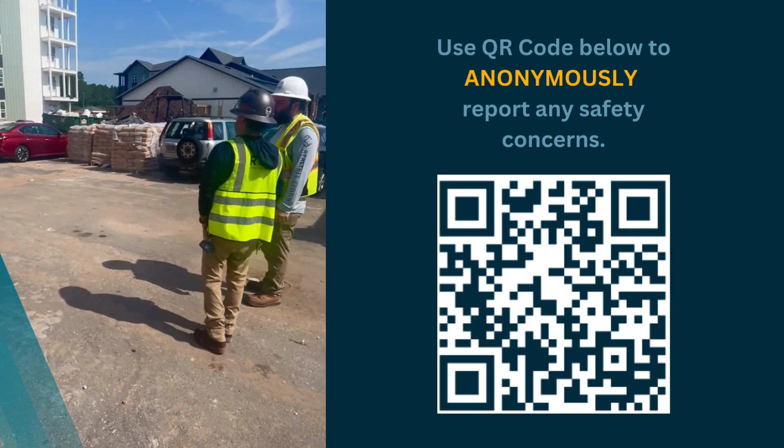RISE is dedicated to the elimination of construction accidents, injuries, illnesses, and fatalities, with the ultimate objective of returning construction workers home to their families, friends, and communities free from harm. At RISE, safety and health is a value which will never be compromised. A safe and healthy work environment is a basic right for all.

Our first and foremost responsibility is to protect our employees and the environment. In addition, we believe we owe it to anyone and everyone working with, in, and around our projects, and to maintain and continuously improve our safety performance. We are committed to protecting and preserving the safety and health of our employees, customers, other contractors, the public, and the environment.

Fostering a culture of caring, trust, and openness by empowering our employees to own safety at a personal level, and by openly supporting and enforcing this policy through the use of stop work obligation and intervention. Providing safe products and services to our customers.

To carry out this policy, RISE will provide appropriate financial, human, and organizational resources to plan, implement, check, review, and continuously improve our health and safety management system. Actively promote a safe and healthy workplace with management leadership and employee involvement. Hold each supervisor accountable for ensuring employees, equipment, and facilities within their area of responsibility are managed in a safe and healthy manner while protecting against negative environmental impacts.

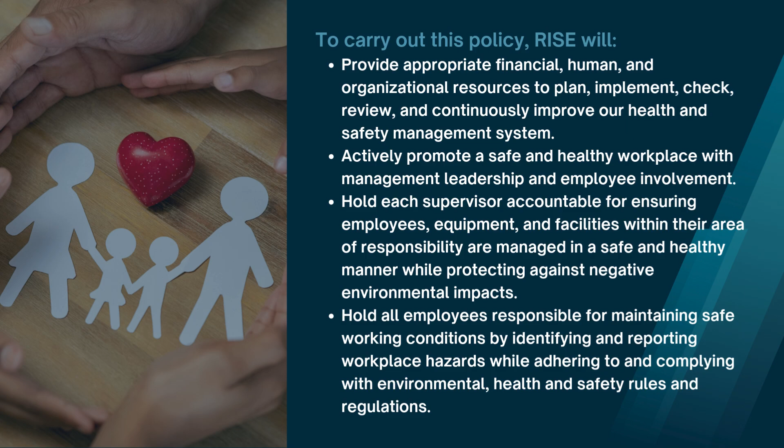Hold all employees responsible for maintaining safe working conditions by identifying and reporting workplace hazards while adhering to and complying with environmental, health, and safety rules and regulations.

Our expectations: Subcontractors must provide competent, knowledgeable supervision of their crews at all times. Maintain frequent communication with the site team. Encourage questions and open communication. Actively participate in site safety and related events.

Promptly report any hazards overlooked by our team. Report all accidents without delay. Provide skilled and experienced crews. Attendance at weekly subcontractor meetings is mandatory.

Inform us of any assistance required to facilitate your work with us. Foster a culture of encouragement within your teams. Maintain clear communication with your crews.

Proficiency in utilizing Procore is essential. Follow all safety rules, policy, and procedures. Perform all work in a safe manner. Report all unsafe acts, safety issues.

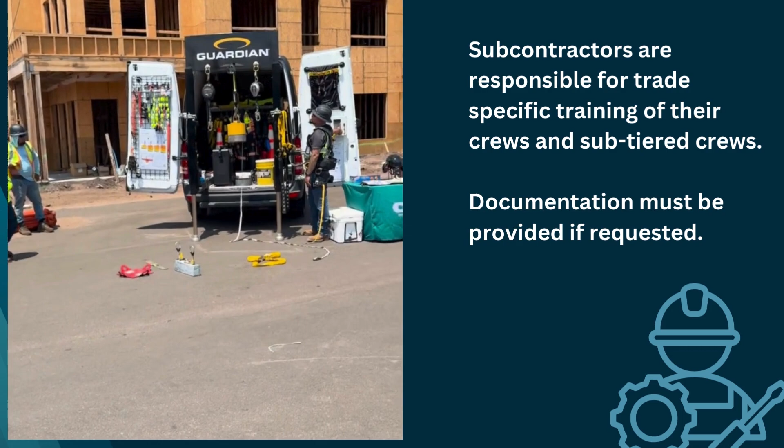If asked to perform work in an unsafe manner, report directly to the site team. Wear appropriate PPE at all times. Subcontractors are responsible for training all of their sub-tiered crews and must have documentation available upon request.

Now we will go over a few basic site safety rules we expect everyone to follow. All personnel must attend a RISE-led safety orientation prior to beginning work. No drugs and/or alcohol is allowed. Any visibly impaired worker will be sent home.

The possession of firearms and/or other weapons is not permitted. Loud music and portable audio devices are not allowed, as loud music can become a distraction. No talking and/or texting on your phone while operating any equipment.

Before operating tools and/or equipment, make sure you inspect that equipment and that you have been properly trained to use that equipment. Fall protection is required for anyone working at heights greater than 6 foot. Do not remove guards or disable safety devices on any equipment you are using.

There is no food allowed in the building, period. Smoking is allowed in designated areas only and never inside the buildings.

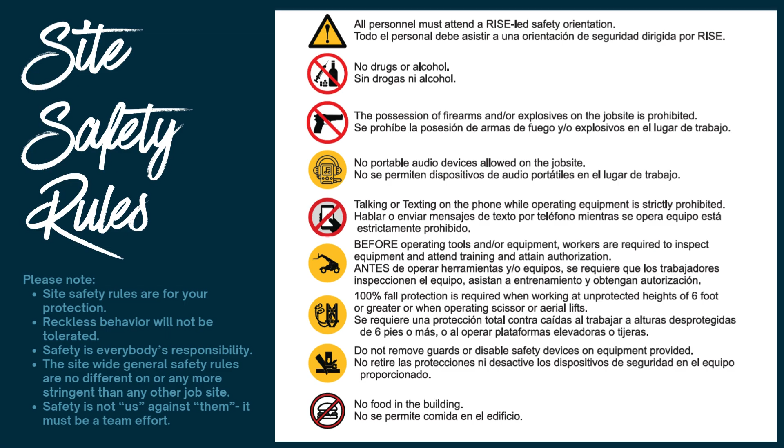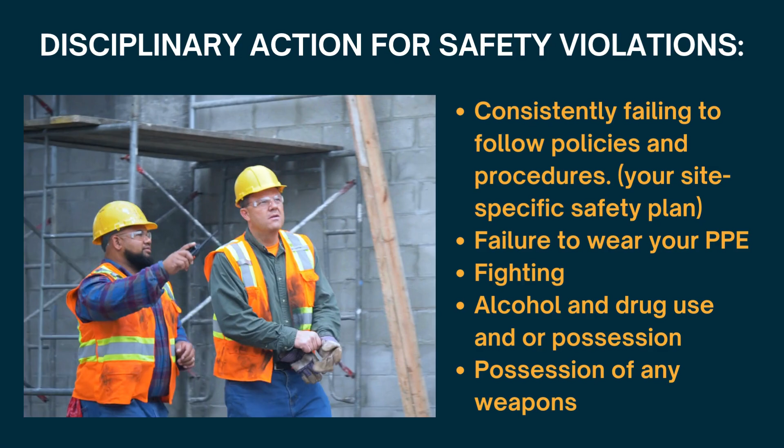As previously stated, RISE has a multi-level disciplinary policy and will be closely followed. Some of the project-specific guidelines for grounds for removal from the job site include consistently failing to follow policies and procedures, your site-specific safety plan, failure to wear your PPE, fighting, alcohol and drug use, and/or possession of any weapons.

Now we will cover the site logistics plan. Please keep in mind that this plan changes frequently as the site and duties change.

The site logistics map should be located inside and outside of the job site office and holds key site information, such as the following: location of entrances and exits, restrooms, parking areas, the location of the nearest medical facility should an emergency occur on site, fire alarm locations, the general flow of traffic within the job site, and will also have the RISE site team's contact information.

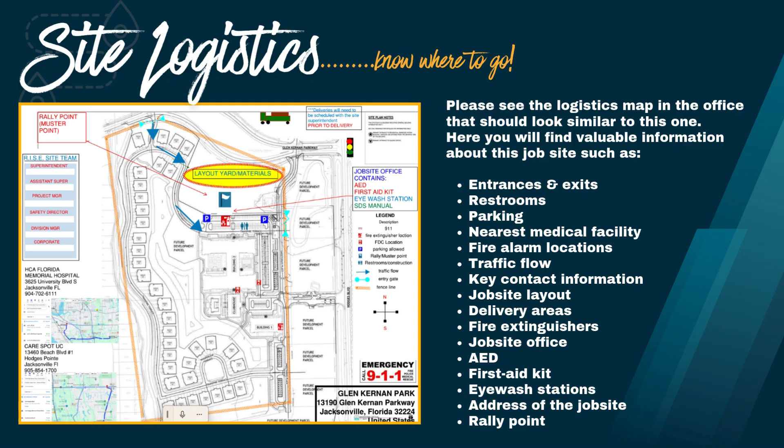As a reminder, please do not block entryways and/or exits.

Have deliveries set up and coordinated with the site team prior to deliveries arriving, and make sure that you have the manpower to offload any materials being delivered, as well as any equipment needed to unload.

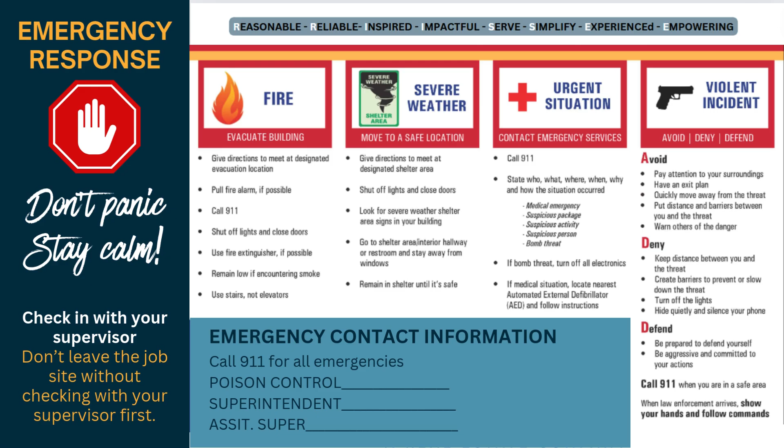The site first aid kit and AED, along with the eyewash station, are all kept in the site office, along with the SDS manuals. Use this chart to determine the course of action for emergencies that may occur while on site. Remember, stay calm during emergencies. Always check in with your supervisor, and supervisors need to make sure to stay in communication with the site team for further instructions. To clarify what should be considered an emergency, use the following definitions when choosing your course of action.

A serious injury is defined as an injury which is an acute threat to life: the worker is unconscious, the worker is bleeding heavily and unable to move, walk, or be transported with minimal assistance, or the worker is unresponsive.

A non-serious injury is defined as an injury in which bleeding can be controlled, the injured person is able to walk and move freely and is able to breathe normally, and does not meet the serious injury definitions as previously stated.

It is preferred that all communications, forms, etc. are done through Procore. Housekeeping.

Housekeeping is the responsibility of all workers. It shall not be left undone or left to someone else's discretion. If you create trash, you are responsible for its prompt removal. There are no maid services offered at any job site.

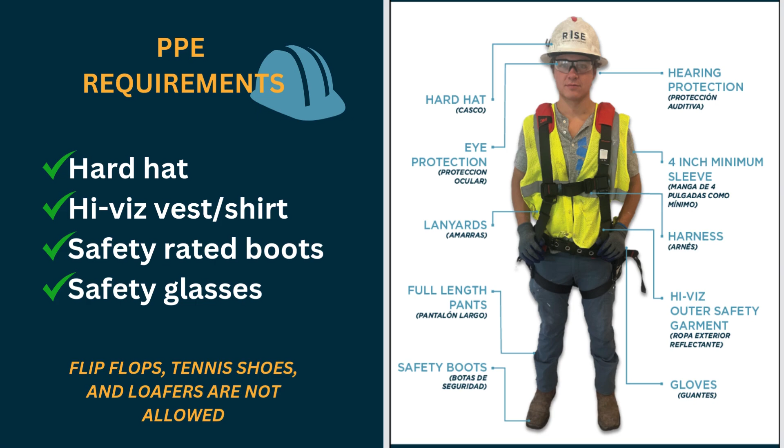The personal protective equipment, or PPE, required on every RISE job site includes a hard hat, high-vis vest, t-shirt or jacket, work boots rated for safety, and safety glasses. Certain tasks will also require specialized PPE, such as working at heights, where you will be required to wear a harness with a lanyard. If you are cutting materials, you may also be required to wear gloves and/or safety goggles, etc. If you are not sure what PPE you may need, please contact any RISE team member or your supervisor.

Please remember that the following are not allowed: cut-off shirts, shorts, tank tops, baggy clothing, flip-flops, sandals, loafers, and tennis shoes.

Next up, hazard communication. If you are working with any chemicals on site, you will need to be aware of what those chemicals are and how to handle them correctly. Ensure that you have the proper PPE on while exposed to those chemicals. Review the SDS information. Some exposures will get worse if treated with water, so make sure you know the chemicals you're working with and how to treat an excess exposure from them.

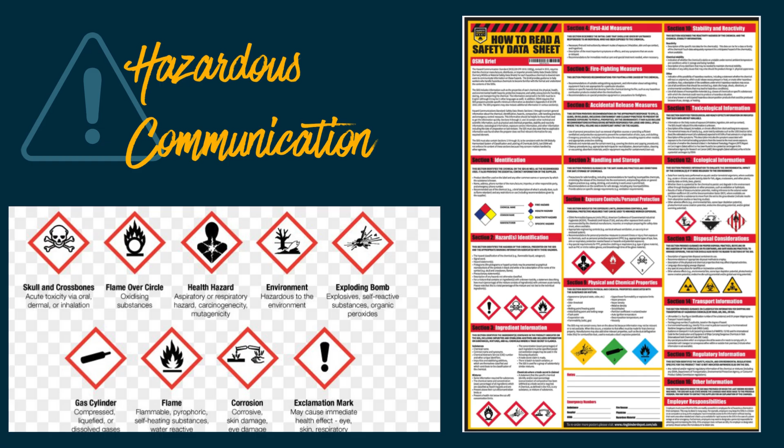See the charts attached here, for example, of the labeling and information regarding the GHS, Globally Harmonized System, for chemicals. Note the symbols representing hazardous chemicals and what reactions they have, for example if they are explosive, corrosive, or flammable, and treat these with caution.

Now we will discuss specific hazards that you may encounter on site. These are what OSHA calls the Focus 4, formerly the Fatal 4 of construction: caught between, electrocution, struck by, and falls. We will address each of these now.

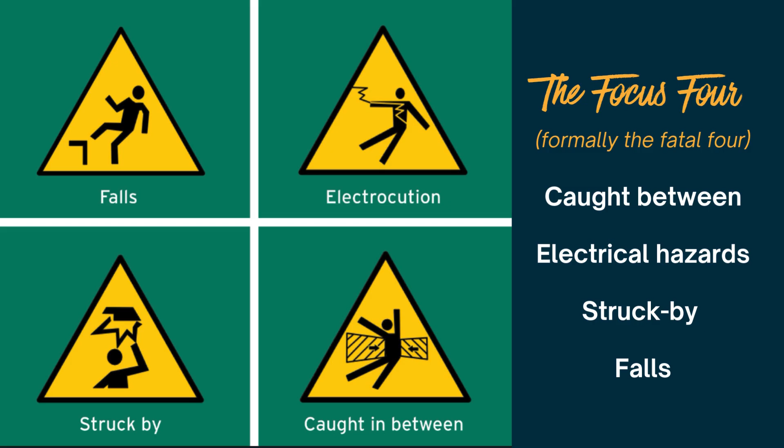The number one cause of serious injuries in the workplace is falls. Falls can happen at any height. Use of personal fall protection is required anytime you are working at 6 feet or more from the lower level. This includes roof edges, roof work, and leading edge work. You are also required to wear fall protection in any lift and/or basket that raises up greater than 6 feet.

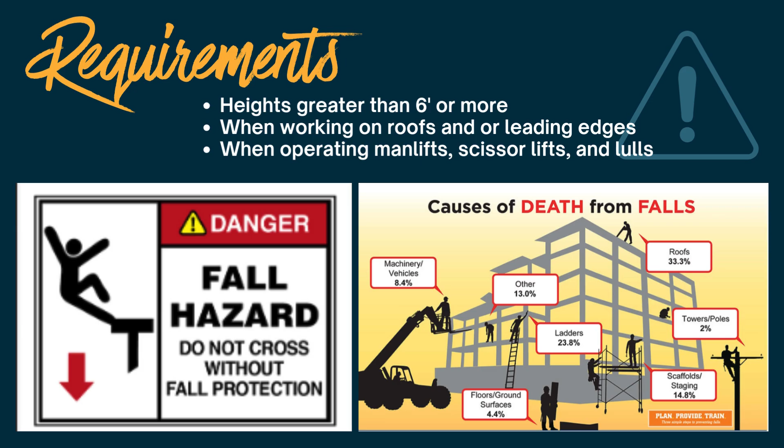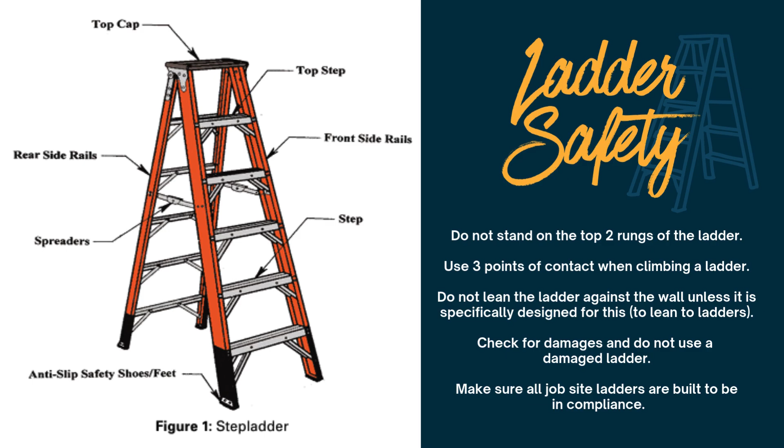Ladder safety. When using ladders, ensure to follow the simple rules. Inspect the ladder for any damages. Metal ladders conduct electricity and are not allowed. Make sure that job site-made ladders are compliant.

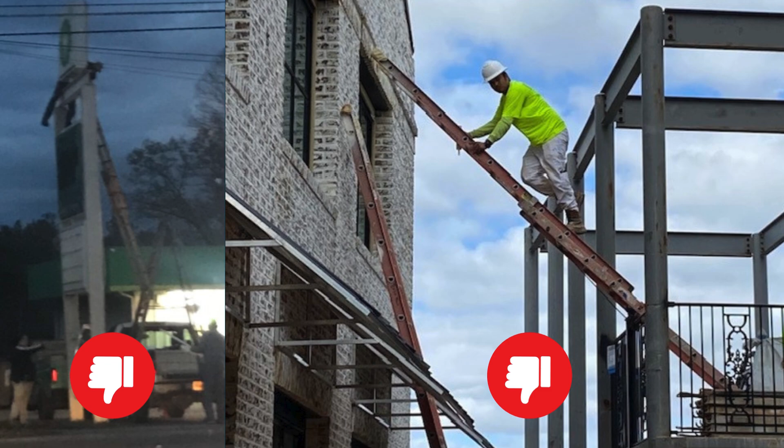Ladders can come in handy when you need them. However, don't ever use a ladder in a way that could cause you to have an accident. Here are a few ways of how not to use a ladder. Remember, job site ladders must be constructed to be compliant. See the attached chart for specifics. Also make sure that they are secured at the top and the bottom to prevent the ladder from sliding away.

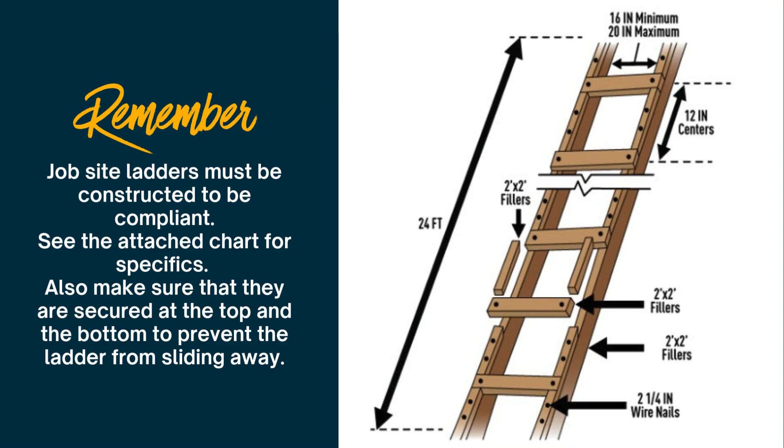Next, we will discuss scaffolds. Scaffolds are commonly used in areas of great heights. Because fall hazards are frequent from scaffolding, fall protection is required. Only trained, competent persons are allowed to assemble and disassemble scaffolding. Fall protection is required for assembling and disassembling of scaffolds.

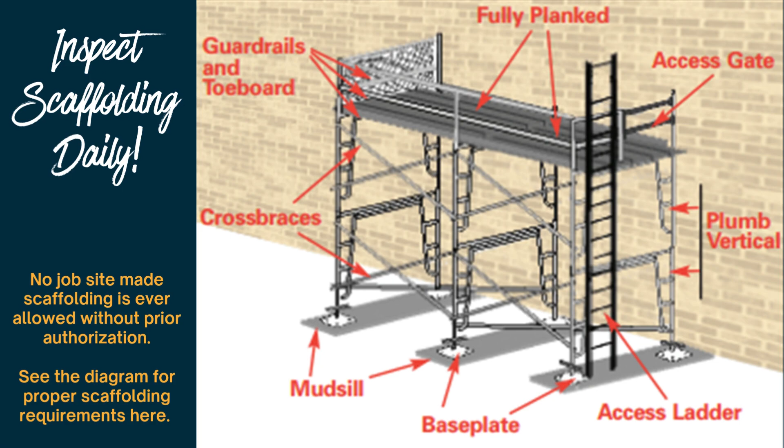Scaffolds are to be inspected daily by a competent person. No job site-made scaffolding is ever allowed without prior authorization. See the diagram for proper scaffolding requirements here. No scaffolding should be erected without first discussing with the site team.

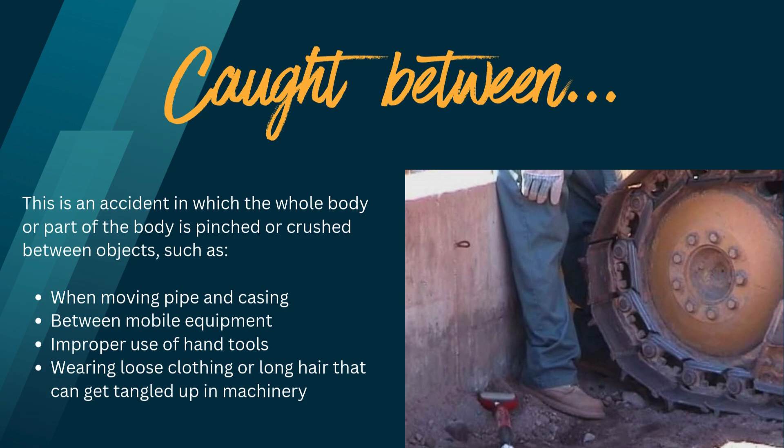Caught between. This is an accident in which the whole body or part of the body is pinched or crushed between objects, such as when moving pipe and casing, between mobile equipment, improper use of hand tools, and/or wearing loose clothing or long hair that can get tangled up in machinery.

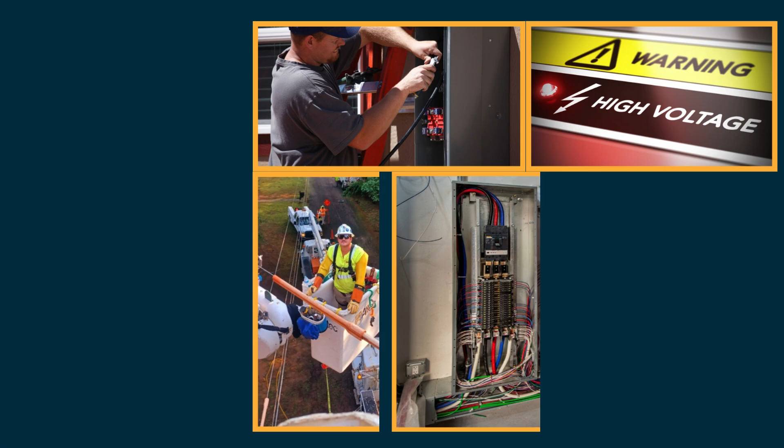Now we will discuss electrical hazards. As previously discussed, electrical hazards can cause serious burns. Some of these electrical hazards have the potential to cause serious injuries and death. All extension cords must be visually inspected to ensure there are no nicks or frays in them. Make sure to check the area around the housing of the cord, that it is not separated. All cords should be the proper gauge.

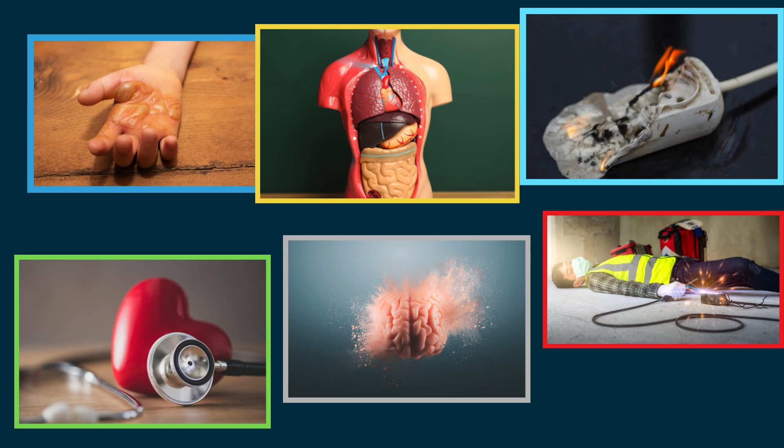The use of any cord less than 12 gauge should not be used. All cords should also have a ground pin. These pins should not be replaced with screws, nails, or any other material. When using extension cords, be sure to either hang them up out of your work area or sweep them to the side in a walkway.

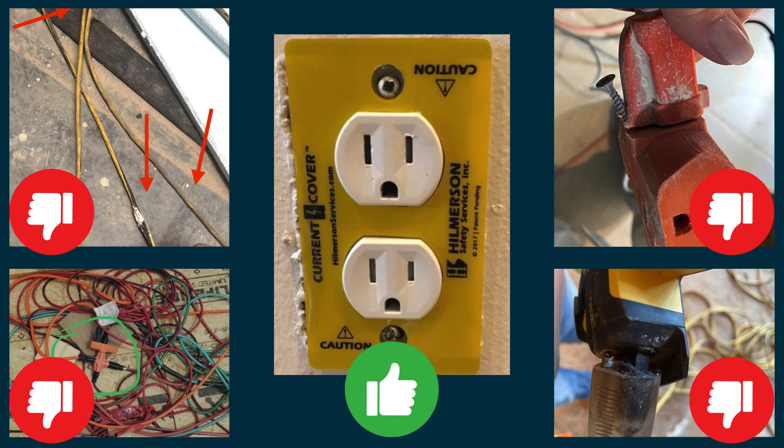Any damaged cords will be disposed of at the subcontractor's expense. Damaged cords cannot only cause injury, but can also lead to fires. Being shocked from a damaged cord is no fun. The use of GFCIs is highly recommended when available. Weekly outlet and receptacle checks are also recommended.

All live wires and parts should be covered with the appropriate plates. Covering these outlets and receptacles with tape is not recommended and is not acceptable. Do not bypass any safety measures being done in panel boxes. These are locked for your safety. If you are having trouble with the GFCI kicking on, speak with the site superintendent so that adjustments can be made.

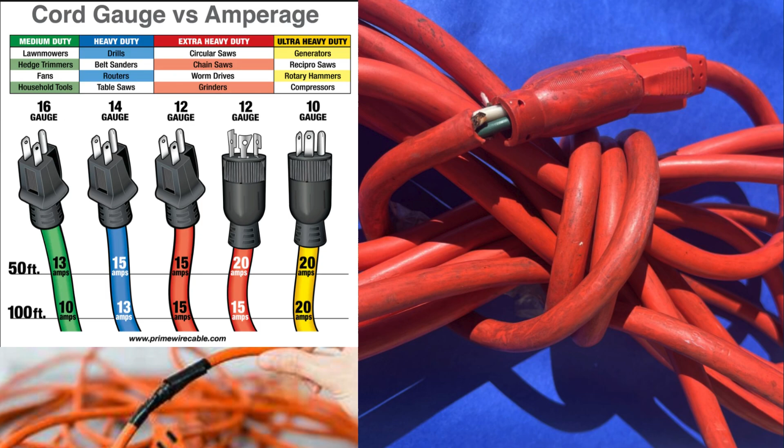Only licensed electricians are allowed to work on electrical elements. No live hot work is permitted at any time without prior approval from the RISE superintendent.

Fire prevention and fire extinguisher use. Fire extinguishers are our first line of defense against fires. Please do not needlessly discharge these. Anyone caught doing so will be asked to leave the job site.

Make sure that you are inspecting fire extinguishers monthly. Do not attempt to fight a large fire. Get out of the building as soon as possible. If it is a small fire, call 911 first, then attempt to extinguish.

To use the fire extinguisher, you will first pull the pin. Aim the nozzle at the base of the fire. Squeeze the handle, and using a sweeping motion, point the nozzle at the base of the fire to extinguish.

Using the acronym PASS can help you remember what to do with the fire extinguisher. P, pull the pin. A, aim the nozzle. S, squeeze the handle. S, using sweeping motion while pointing the nozzle to the base of the fire.

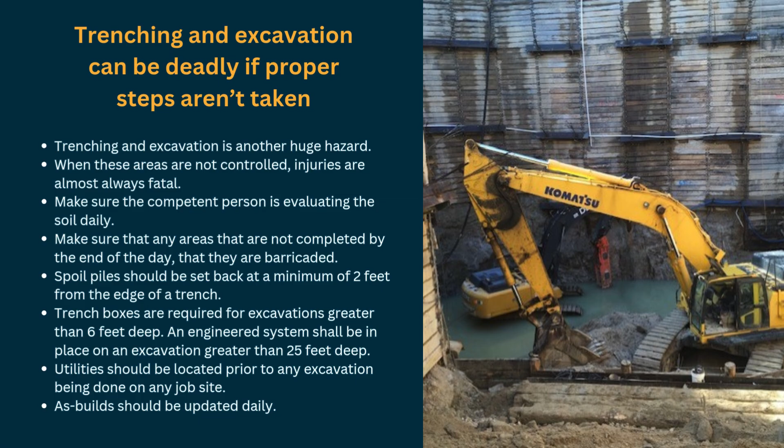Utilities should be located prior to any excavation being done on any job site. As-builds should be updated daily. And never ever enter an unprotected trench.

Heavy equipment should only be operated by those that are specifically trained on the equipment. All heavy equipment must be in safe operating order. Use caution when working or walking around near heavy equipment. You must make eye contact with the operator prior to going in its path. Backup alarms on equipment are required, as well as spotters on tight job sites.

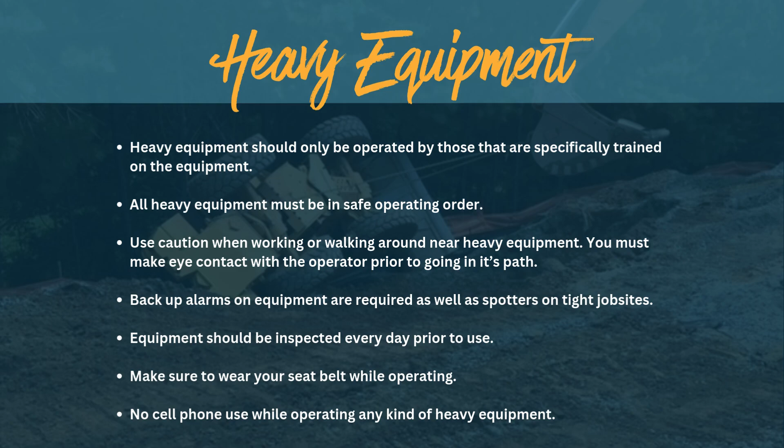Equipment should be inspected every day prior to use. Make sure to wear your seatbelt while operating. No cell phone use while operating any kind of heavy equipment.

Hand and power tools. Hand tools can be dangerous if not used properly. Make sure that you wear the correct protective eyewear if you will be using any power tools. Use these only for the purpose they were intended for. Do not leave tools laying in overhead work areas where they could potentially fall on top of someone.

Make sure that the safety guards are not removed from tools and that they are working correctly daily. Do not lift or lower tools by their cord. Keep hands away from moving parts.

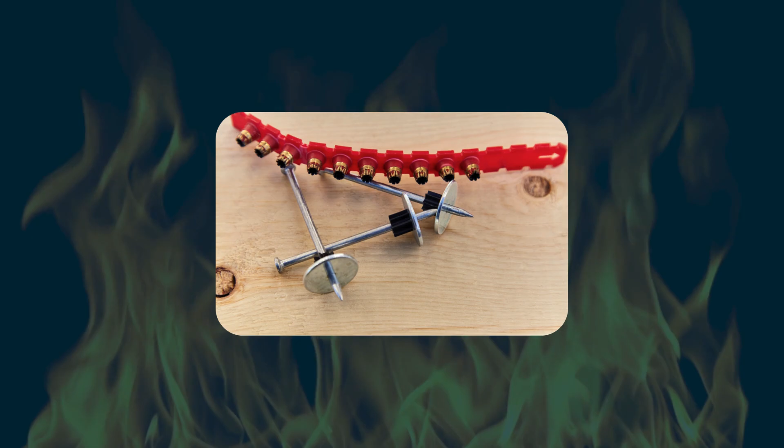Powder-actuated tools, if used, require additional authorized training. Be sure to discard all powder-actuated strips that have been used properly. If not discarded properly, these can be the source of fires in a wood-built structure.

These tiny particles can travel deep into your lungs and cause silicosis, an incurable and sometimes deadly lung disease. Silica also causes lung cancer and other potentially debilitating respiratory diseases such as chronic obstructive pulmonary disease and kidney disease. In most cases, these diseases occur after years of exposure to respirable crystalline silica.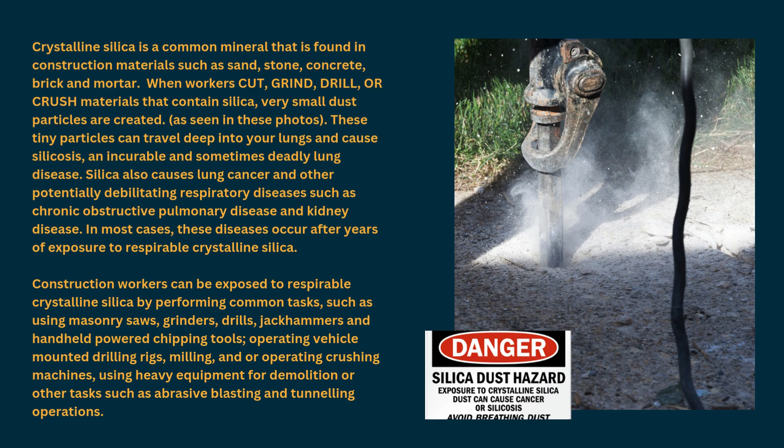Construction workers can be exposed to respirable crystalline silica by performing common tasks such as using masonry saws, grinders, drills, jackhammers, and handheld-powered chipping tools. Operating vehicle-mounted drilling rigs, milling, and/or operating crushing machines, using heavy equipment for demolition or other tasks such as abrasive blasting and tunneling operations.

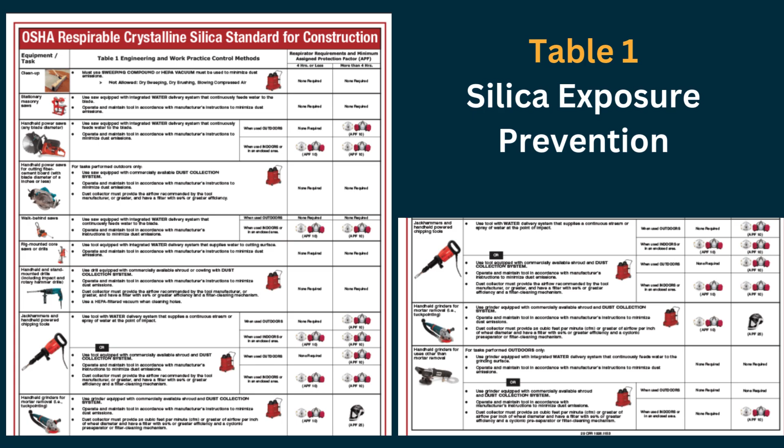To limit exposure, follow the guidelines set forth in Table 1, listed here: cranes. When a crane is scheduled to be on site, a lift plan should be submitted prior to arrival so it can be reviewed and changed if necessary. A pre-crane meeting will also need to be done, and those forms can be found in Procore under the Forms section of the project, no matter what size crane you expect to use. Proper preparation must be done prior to the crane's arrival on the job site.

Hot work. OSHA defines hot work as any operation that produces sparks or flames, such as welding, cutting, or burning. Hot work permits are required for all RISE job sites. These permits are located in the job site folder in Procore under the Forms section. Before beginning any hot work, you must first notify the RISE site superintendent.

Hot work should only be performed after the necessary precautions have been taken. When possible, any cutting of metal materials should be done outside of the building. If this is not possible, make sure you have cleared the area of any fire hazards and use fire blankets to shield any areas that will directly be affected by sparks and/or flames.

A fire watch must be done for at least 30 minutes after hot work has been completed, except when working on the roof. In this case, a fire watch will need to be done for at least 1.5 hours after work is completed. Remember this as you are planning the work.